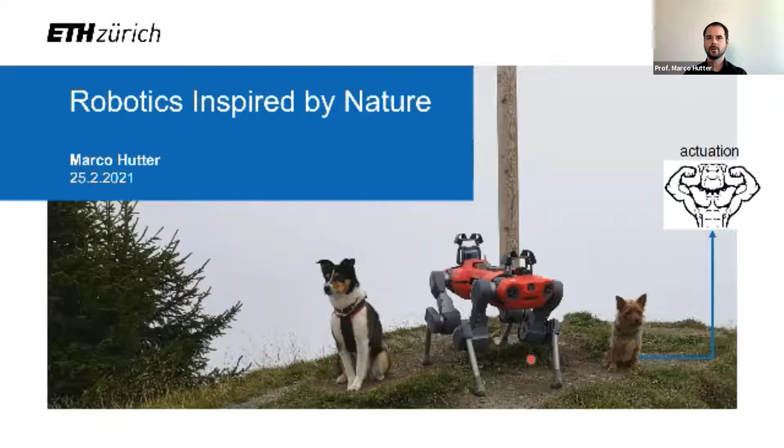In this brief introduction, I would like to tackle two elements and show how we take inspiration from nature. The first one is actuation, and the second one is control. I'll show you how we can take inspiration here from nature to make our robots a little more capable.

Now, when I started research in this field almost a decade ago with my PhD, building some of the first quadrupeds that we had at ETH, what I did first is that I bought a small dog.

What really fascinates me about dogs is that they combine all kinds of excellent skills in one unit. First, dogs are extremely fast—not quite as fast as a cheetah, but still very, very fast. Second, they're extremely versatile—almost any terrain, they can get across it and easily adapt. Third, they're very efficient—give them this amount of food and they will operate for the whole day. And fourth, they're also extremely robust. So don't worry, the dog was never harmed—it's actually just sitting below me, so everything is still in good shape.

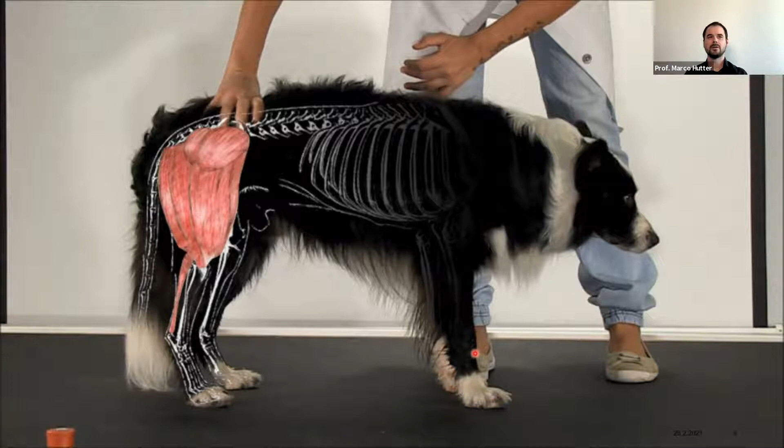Now, the reason they achieve that to a large extent is due to how these animals are built. We took one of the dogs to our office space and put it on a treadmill. If you look a little more carefully, you see that dogs are actually pretty compliant. They have rigid links for the bones, but the actuation, composed of muscles and tendons, acts very compliantly.

That helps dogs and also other animals and humans, in particular while running and doing dynamic maneuvers. There have been extensive studies, in particular by the biomechanics community, analyzing how this muscle-tendon system helps animals locomote. What they figured out is that this mechanical compliance integrated by muscles and tendons increases robustness of the system. If you get external disturbances, it just leads to a deflection of a compliant element, but it doesn't really harm the muscles. It allows energy storage temporarily, and then release of this energy in a very short time, increasing the peak power of our actuation.

And last, and I think this is really the most important aspect for us from a controls perspective, it turns a position-controlled system into a force-controlled system.

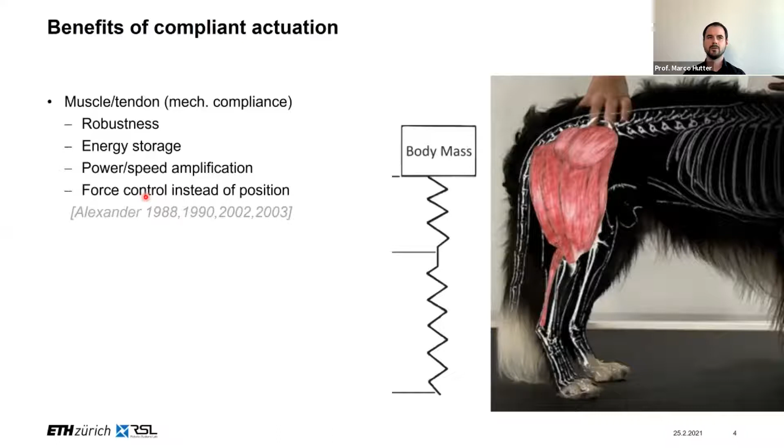Taking inspiration from that, we went into the robotic application and changed the way how classical robots were built. A classical robot is typically composed of a motor and a high gearbox reduction that directly drives the link. With this system, we want these industrial robot arms to follow predefined trajectories very precisely, independent of whether they're carrying a 200-gram screwdriver or a 200-kilogram motor block.

So any disturbance is just canceled out. And this would be extremely harmful if you would place them in an unstructured, unknown environment.

In contrast to that, by including compliant elements, just as the muscle tendon system has between the gearbox output and the link, and decoupling these two dynamic elements, you essentially get a much more dynamic and force controllable system.

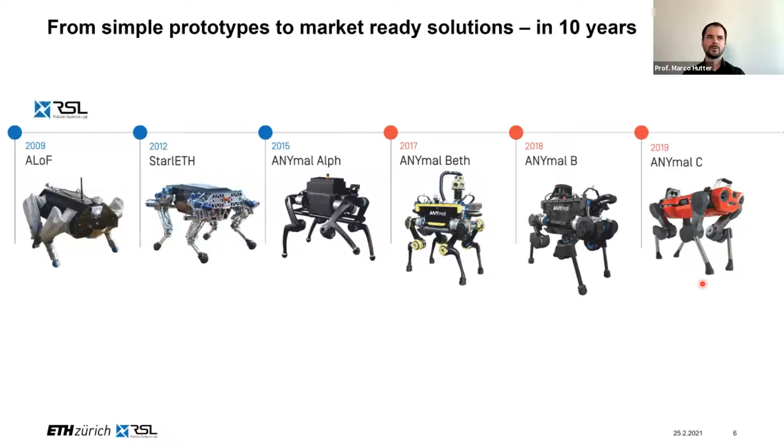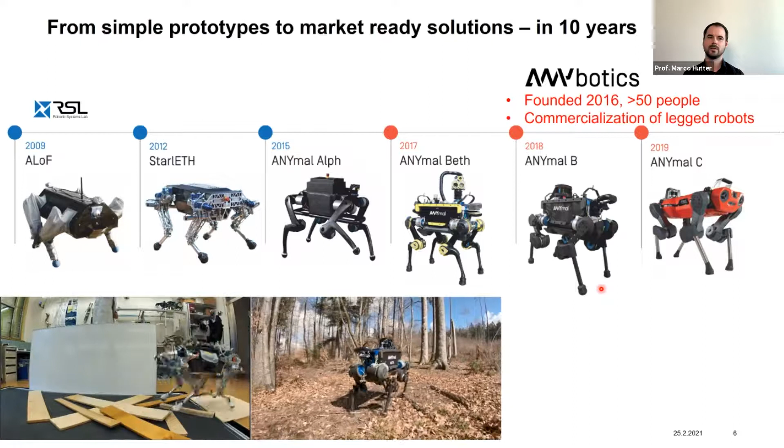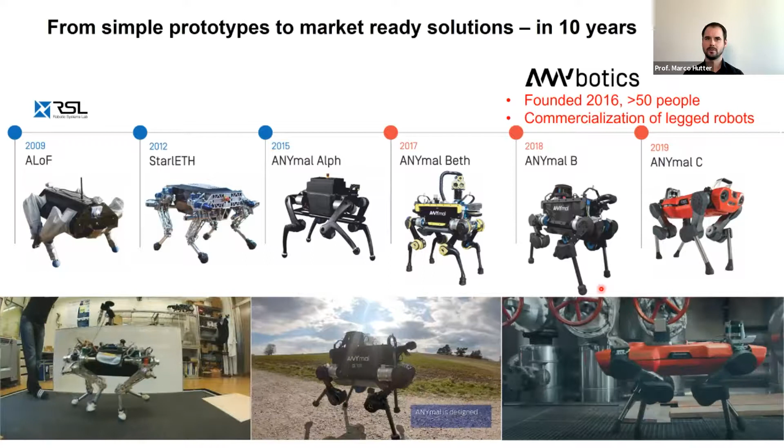Using these principles, we generated a series of quadrupeds over the last decade, which ended up in this ANYmal series. The first ones were really done in research environments in the lab, just for studying the fundamental principles of dynamic locomotion. Then we had a couple of research prototypes that we could take outside into the field, which we also shared with researchers around the world. And in the meanwhile, there's a company really industrializing this as a product in order to make it useful for industrial inspection. Now what I'd like to do is have a bit of an in-depth analysis of what happens in dynamic maneuvers like this and how these compliant elements can support that.

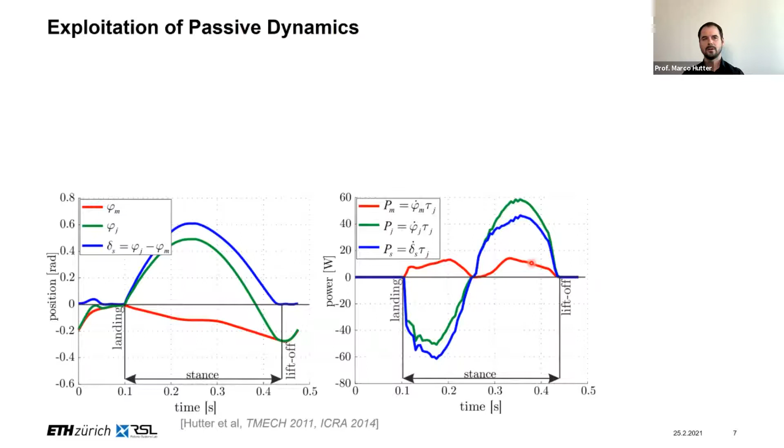If you put this in numbers, there's about 60% of energy that is stored and released purely mechanically, purely passively. The second element is that the peak power that the motor produces here is only about a quarter of the peak power that we see at the joint. So in other words, we can have a much smaller motor, still achieve high peak power, and by that make a system that is more dynamic.

Now, what interested me at the time is that if you compare this to biomechanical studies—this was a study done by Roberts in 2002, biomechanists who analyzed what happens in the Achilles tendon during running—you can see that the curves here look very similar. In other words, what we see in the muscle tendon system during running, on the biomechanical side, is really something that we could replicate here to a certain extent, using so-called series elastic actuation.

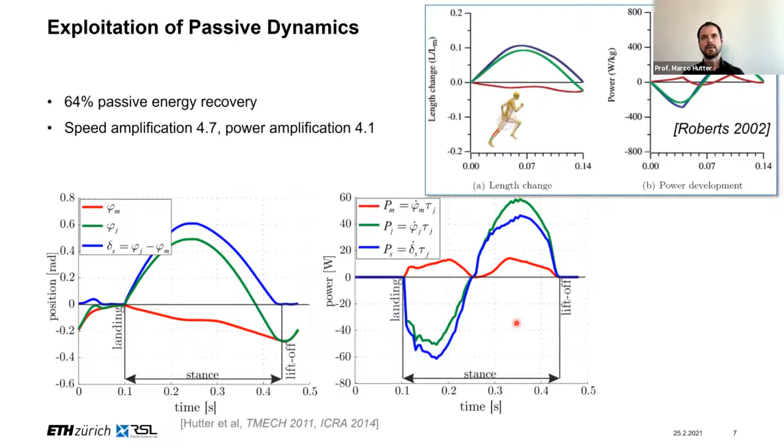The second aspect, which Nicola also introduced at the very beginning, that I want to talk about here is control, and I'll dive a little bit into what the general public often calls artificial intelligence. Or, better in our words, how we can use machine learning and neural networks in order to control robots. This is in contrast to the classical model-based approaches.

Now, to do machine learning, to learn for a robot, we need data, and we need a lot of data. So typically what we're doing is using simulation in order to generate a massive amount of data at almost no cost. We can do this much faster, without destroying robots if things go wrong.

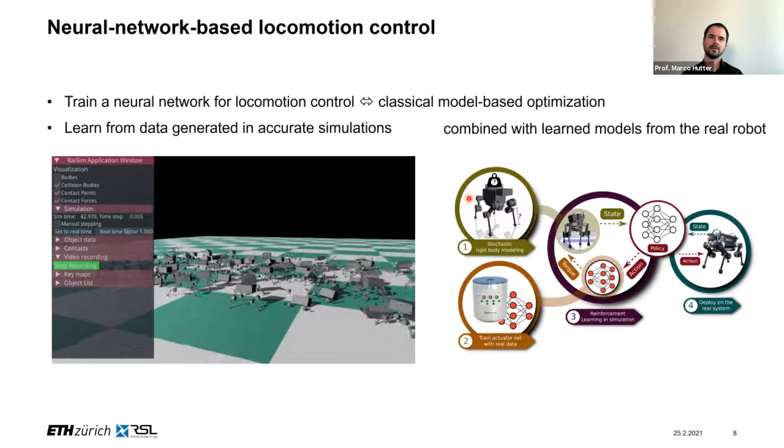The second aspect which we integrated into our research, and which turned out to be pretty crucial, is that we also went to the real systems and took information from the real system in order to bridge the gap between what you're simulating and what you see on the actual system, to make the simulation much more accurate. And a second reason I'd like to show this here is because this is work by two brilliant PhD students that were in my group, Jemin and Joonho.

Jemin, in the meanwhile, is already at KAIST, and this shows a little bit how this collaboration between Switzerland and Korea is already working today. Now, if you do this, you can start to learn to locomote. The more you learn, the better you get, until you have a machine that can really walk around.

As you've seen in the intro by Nicola, one of the key aspects is that we have machines that can adapt to different types of environments. This is something we looked at here, and it's the only slide where I dive a little more into technical details. So how can we make these robots adapt to arbitrary environments, not only flat ground like in the lab, but loose gravel, slippery, icy surfaces, snow, and even vegetation where it can get stuck.

The trick we applied is that in simulation, we trained a teacher policy which takes a lot of privileged information - things we can generate in simulation but typically don't know about the environment, like exact contact states, contact friction properties, the exact height profile, and stuff like that. Then we trained a student policy, which we deployed on the system, that tries to figure this information out purely from proprioceptive information - from experience while walking through a certain surface - to recover the same information you'd generate from privileged information on the robot.

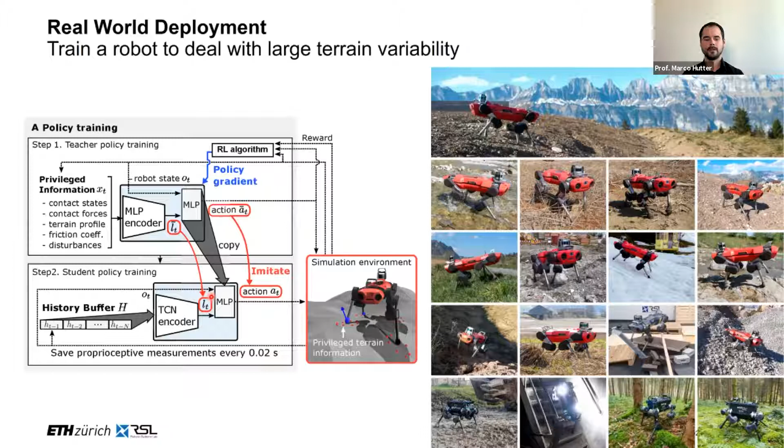We paired this with an adaptive terrain curriculum learning, so the better your robot becomes, the harder you make the environment, such that you challenge the robot more and more, until you have policies that allow the machine to walk over almost arbitrary types of terrain.

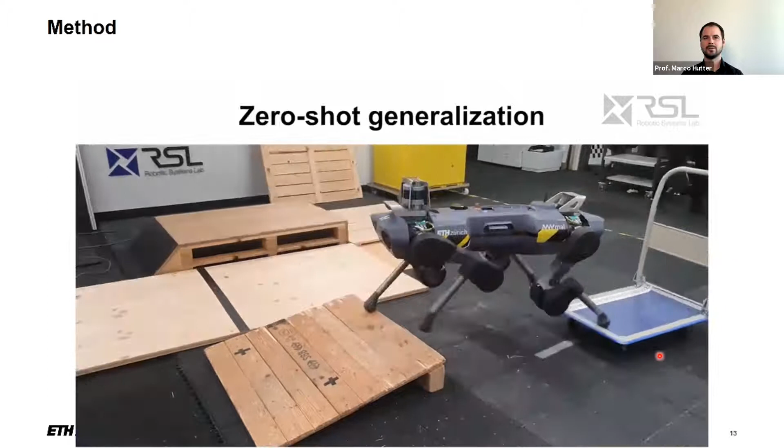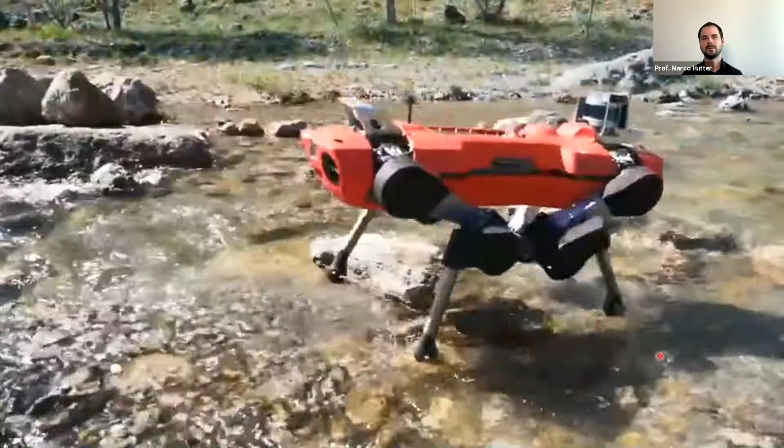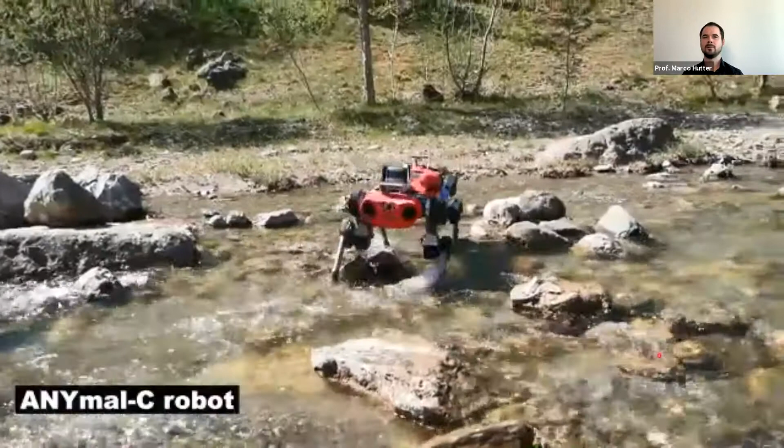We took this and put it on a real system, and it really turns out that it generalizes beautifully. We could suddenly walk across terrain purely blindly without having everything about the environment modeled in detail. You could take the robot out of the lab, bring it to some nice scenery in the mountains on hikes, where it really has to deal with very challenging grounds, loose grounds, slippery surfaces as in this riverbed, or even vegetation where the robot might get stuck. That shows a little bit where this mobility can go in the future and what kind of applications one can envision in the near term or even midterm.

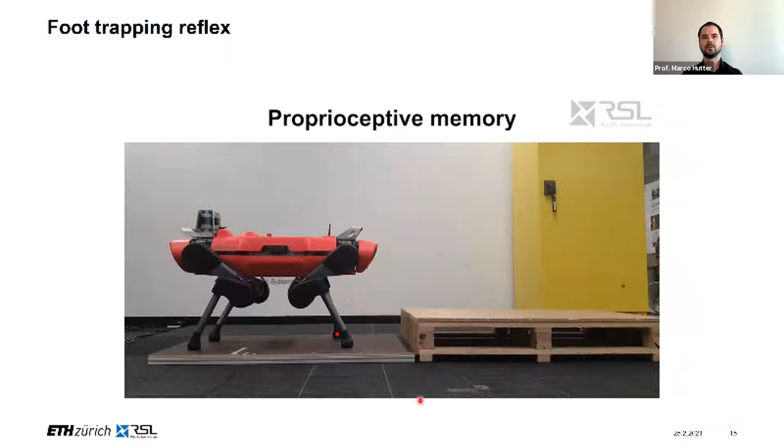A few interesting aspects which are also seen in nature to a certain extent: what you see here is the robot walking onto a step that it doesn't see. The robot starts walking, then hits that obstacle. Now it remembers there's an obstacle and triggers reflexes to get around it. These are elements that previously had to be handcrafted, and now with this new technology, we could generate neural networks that remember this and use it to trigger reflexes.

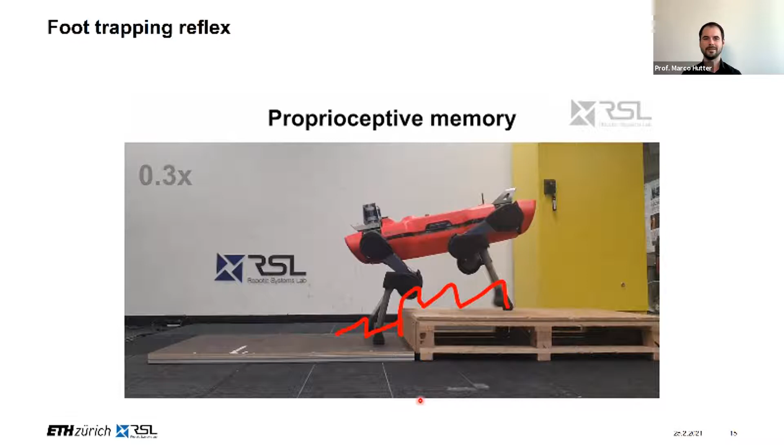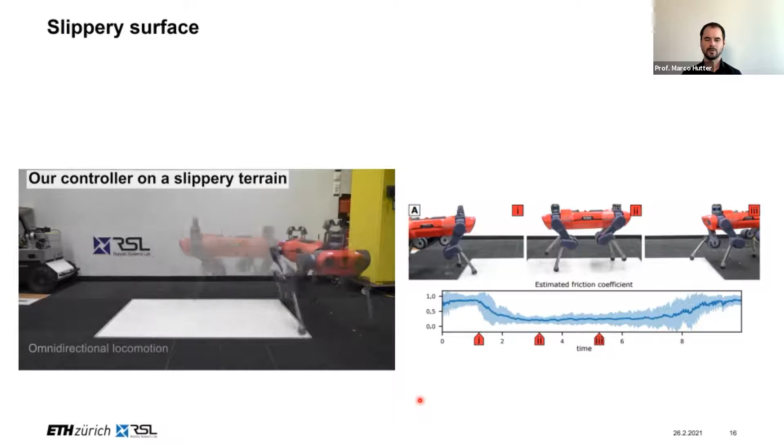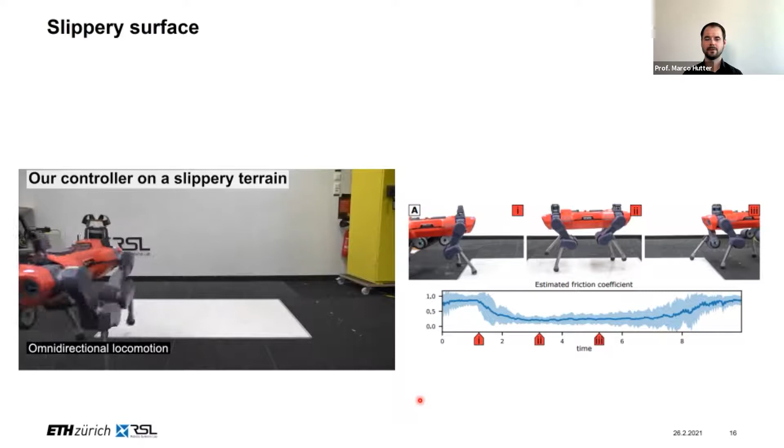Similar behaviors happen when going on very slippery grounds. You see how the robot walks on slippery surfaces and immediately adapts its behavior. That's also something that before had to be tediously handcrafted, and now we have methods that allow the robot to estimate friction coefficients. As soon as we start sliding, we walk a little more carefully, and once we have great surface under our feet again, we walk normally.

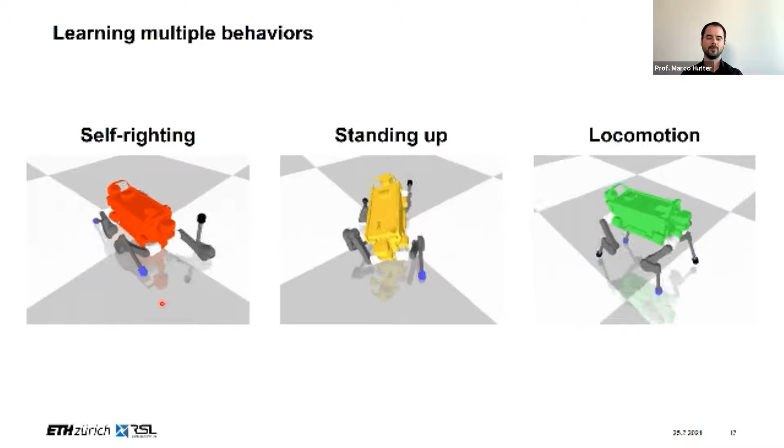You can also start combining different behaviors and do all kinds of crazy maneuvers. Here is how to combine self-righting, standing up, and locomoting in a clever way. These are behaviors you can generate with that.

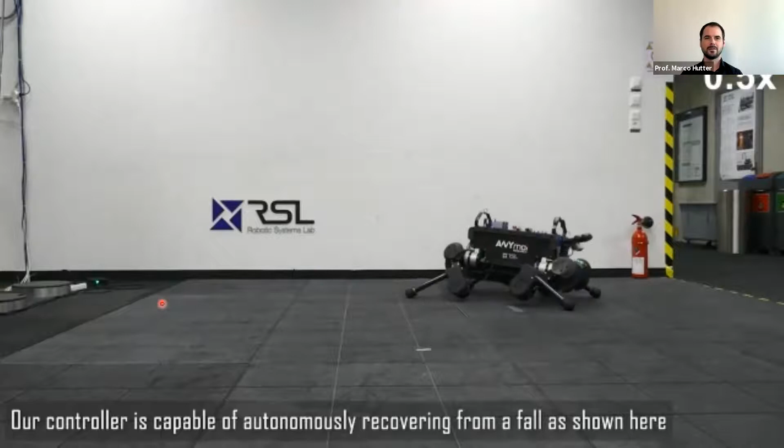You see a robot that falls over, realizes it falls over, recovers from that, and keeps operating. It can actually be put in an arbitrary configuration on the ground, and the robot will figure out the way to stand up and continue to operate.

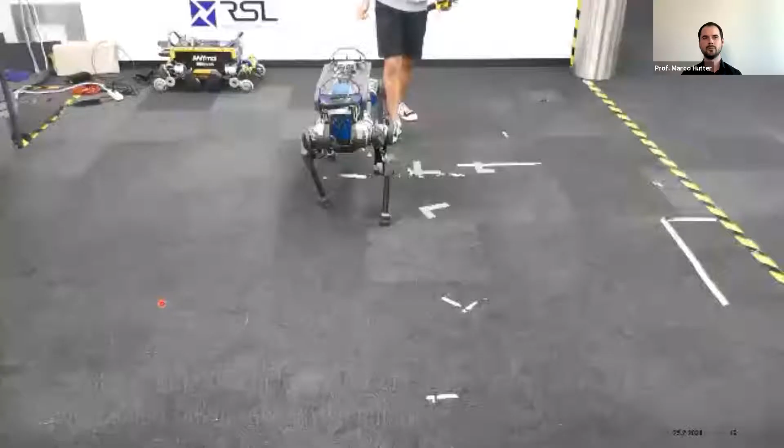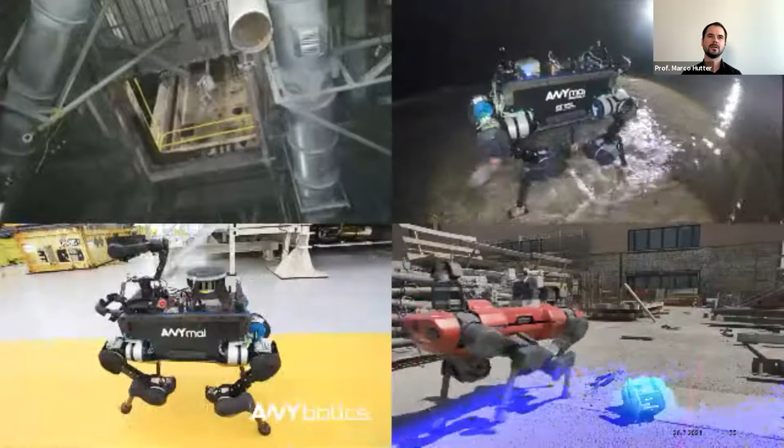I think it's a very nice demonstration of where mobility can go in the future, what we will be able to achieve with these types of robotic systems, and what type of applications we could possibly tackle in the future. With this last element, where I show you where this robot is deployed, I want to come to the end of my introduction talk. You see here 4 different areas where we deployed it.

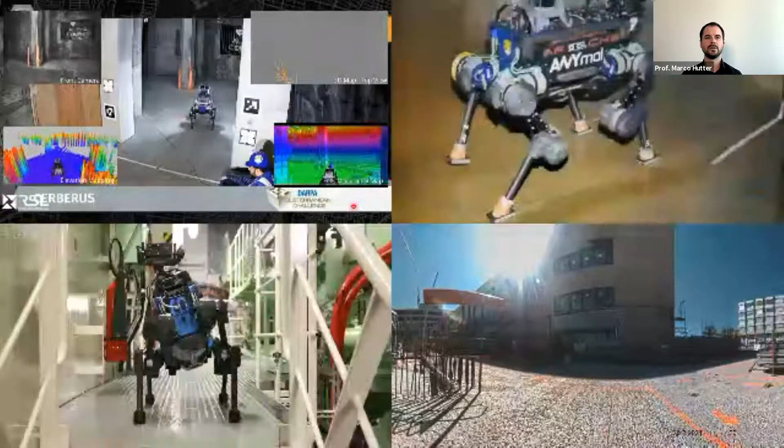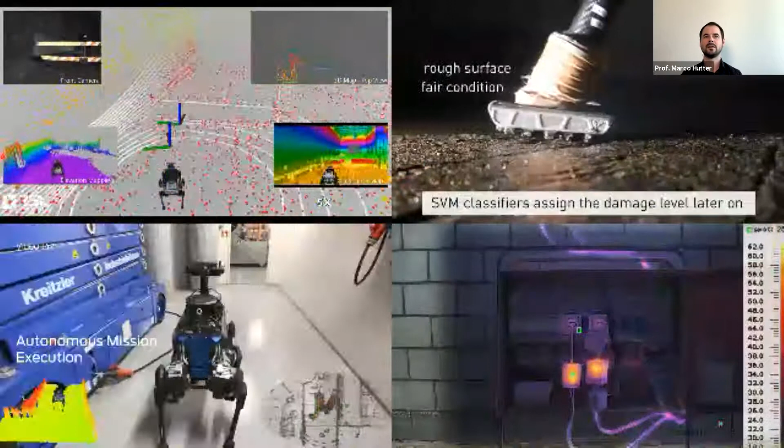Top left is an inspection or exploration mission we did during the DARPA Subterranean Challenge in a nuclear power plant in the US. The robot is left free at the entrance and has to go into the plant, explore the complete environment, figure out how it looks, and assess whether there's a danger somewhere or not.

You see how the robot maps the environment, detects free spaces, and moves around autonomously. On the bottom left, you see an inspection routine on an offshore site in the North Sea. Then we have inspection and surveillance for safety purposes on a construction site, bottom right.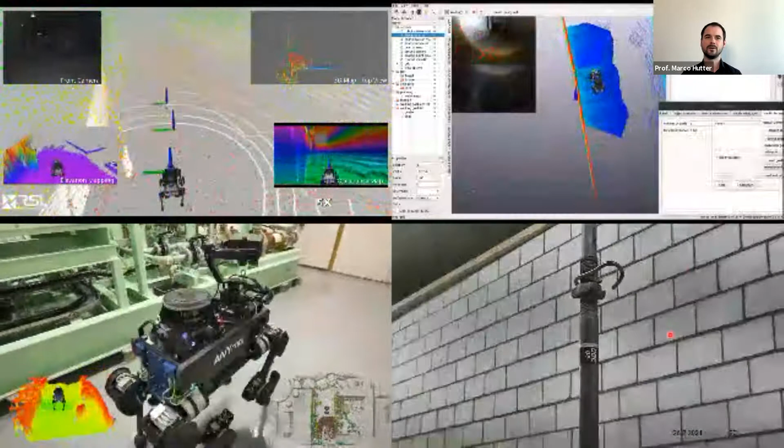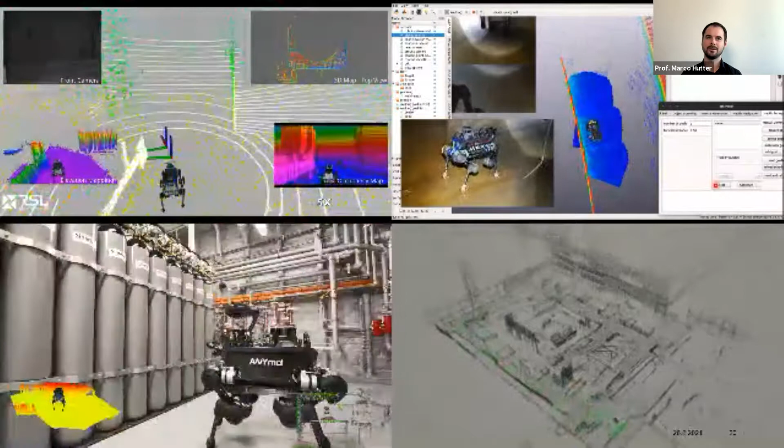And here on the top right, you have sewer inspection in Zurich. The City of Zurich has more than 100 kilometers of walkable sewers, where on a daily basis 10 people are sent walking in the sewers to figure out whether everything is operating the right way, if there are cracks, if things are stuck. These are jobs that in the near future I would like robots to take over.

So let me conclude with a few statements about why I think inspiration from nature can help us a lot in robotics. First, nature is really a great source for inspiration. But vice versa, robotics can also help us better understand nature. By showing principles in robotics, we can help biomechanists and biologists interpret some of the findings in nature.

Second, I think it's important to understand that biological systems and robotic systems are distinctly different. So in my eyes we should really not try to copy nature, but rather borrow ideas from nature, and then exploit the strengths that we have in robotics.

Third, nature is also helpful as a feasibility demonstration. It demonstrates what is possible given the constraints of physics on Earth. Knowing that something works is already a pretty big hint whether you should pursue it, and it also hints at what requirements you need in terms of energy, power, and what size of robot you might design for a certain task, and what a possible solution might be.

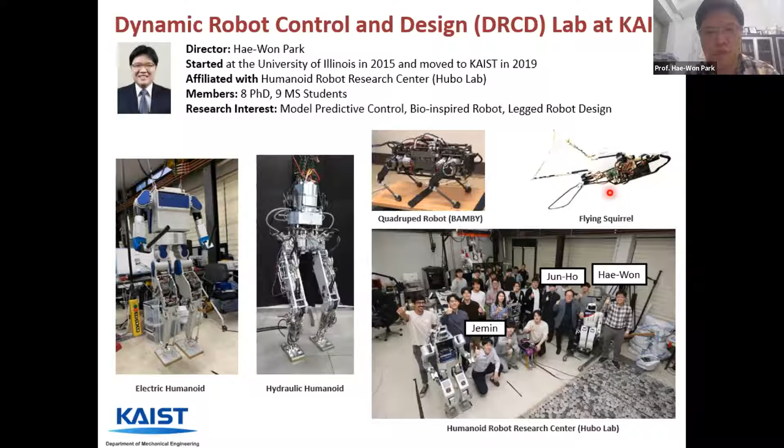Let me show my research video. This is my master's degree topic, which is a dolphin fish robot. It can actually swim up to 1 meter per second, and it can make a turn left or right.

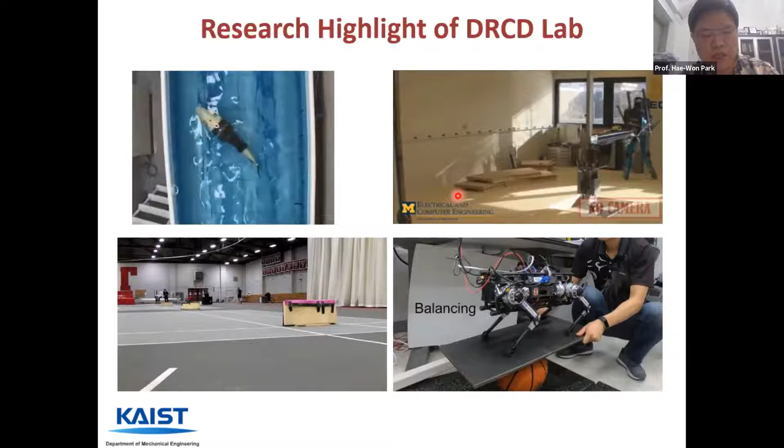The second video is about my PhD topic, which is Mabel, bipedal robot Mabel from University of Michigan. In this video, the robot is able to walk over uneven terrain blindfolded, so you can imagine the robot has to walk on uneven terrain without any vision sensor.

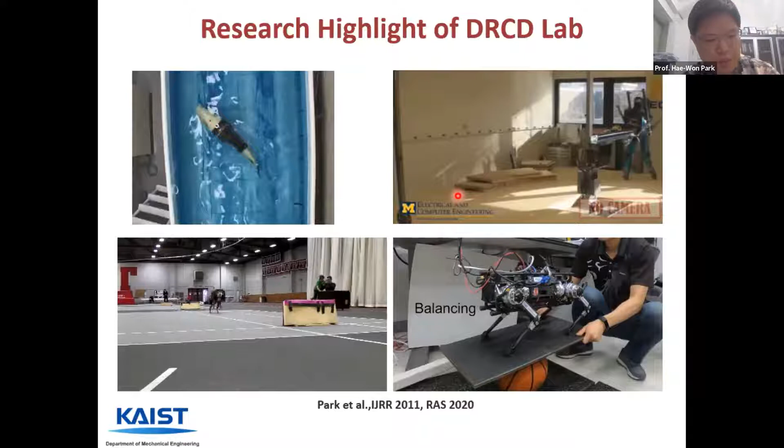After that, I went to MIT. This is probably a very famous video on YouTube, the MIT Cheetah 2 robot running and jumping over obstacles. Here I use the vision sensor to detect the obstacle and plan the jumping motions in real time.

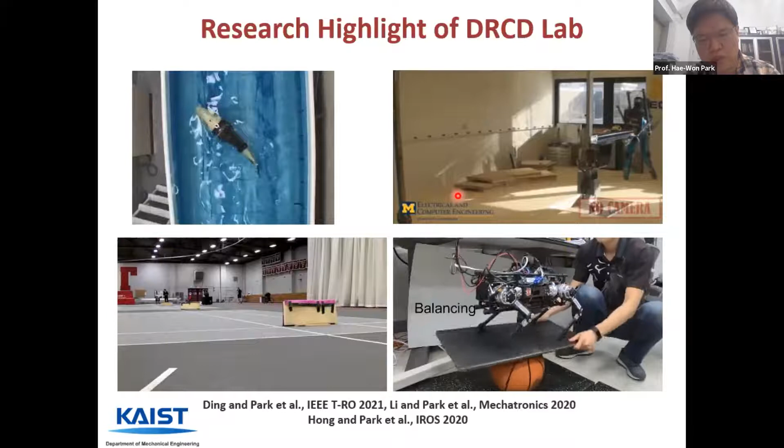After that, I joined University of Illinois, and I made a quadruped robot that is able to balance. It's a really small robot, but it has the ability to calculate all the forces and all the state estimation inside the robot, so it's able to overcome uneven and rough terrain utilizing the model predictive control approach.

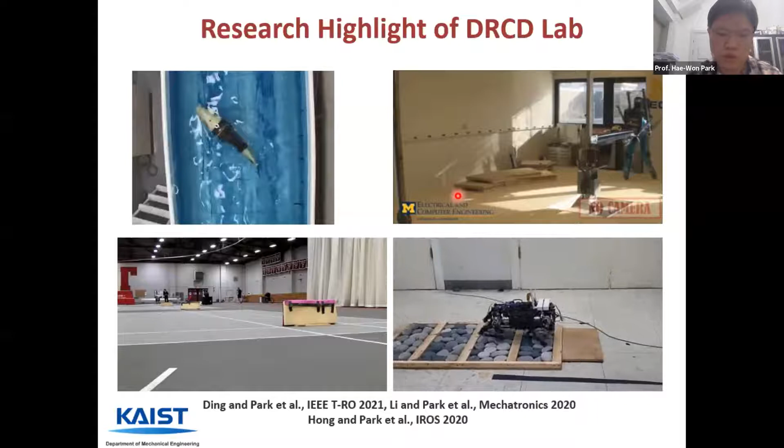I now focus more on the control side of the robot, but the topic of this webinar is bio-inspired design of legged robots, so I will talk about that.

Probably one of the most famous bio-inspired robots is the Stanford Gecko robot from Stanford University, made by Professor Sang-Bae Kim, now at MIT. This robot uses nanostructure to enable vertical wall climbing.

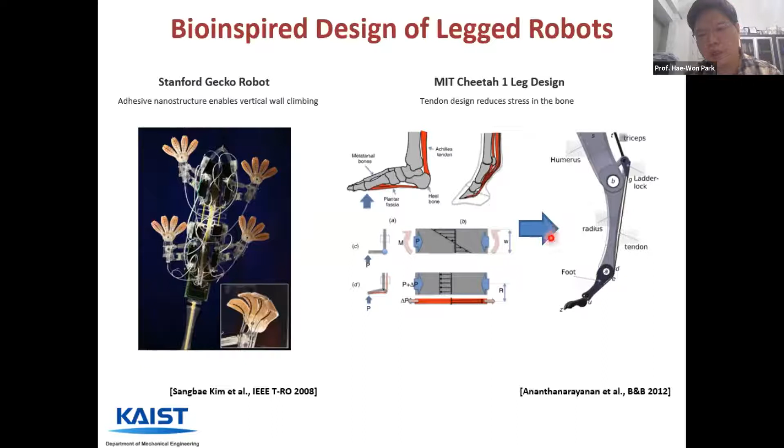Also, the MIT Cheetah robot utilizes bio-inspired design. They utilize tendon and bone structure observed in quadruped animals and implemented this idea into the leg design to reduce the stress in the bone.

When we design this kind of robot using bio-inspiration, we usually follow this process: first, we define the functional goal we want to achieve in the robot. Then we look at the biology, how the biological animal achieves this functional goal. We try to implement and devise some robotics mechanism utilizing the tools in robotics, for example analysis and simulation, engineering design and implementation, and finally experimental testing to verify whether the functional goal has been achieved in the robot.

In this talk, I will provide two examples of this process. The first functional goal I want to achieve is aerial and terrestrial multimodal locomotion, and the second functional goal is a foot design with improved traction.

So we will look at the biology. Especially we look at the flying squirrel, how it achieves aerial and terrestrial multimodal locomotion, and we look at the foot design of the cat. I will talk about engineering design, simulation, and experimental testing of this mechanism.

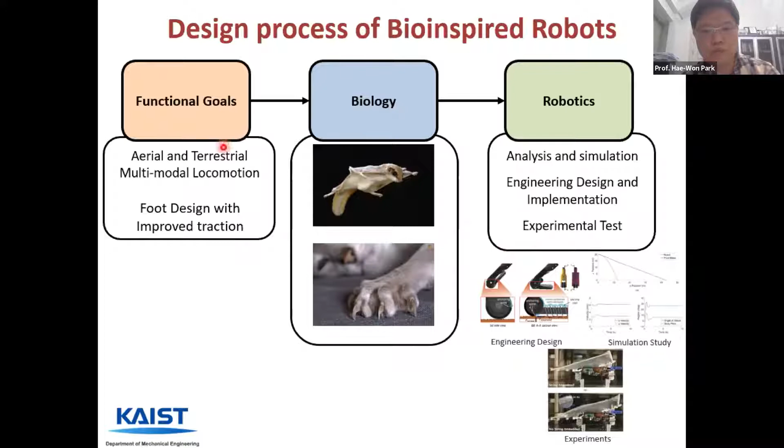But before we go on, we have to take these topics into consideration, because the animal and the robot are different systems and mechanisms, so we have to take this into account in the design of the robot. First of all, animals have a lot of degrees of freedom, usually more than 300 degrees of freedom.

We cannot have 300 degrees of freedom in our robot because it can be too complex and too heavy. So usually the robot's degrees of freedom is much less than 50, and the actuation system is different. In robots, usually motors are used for actuation, while in biological systems, muscles are used.

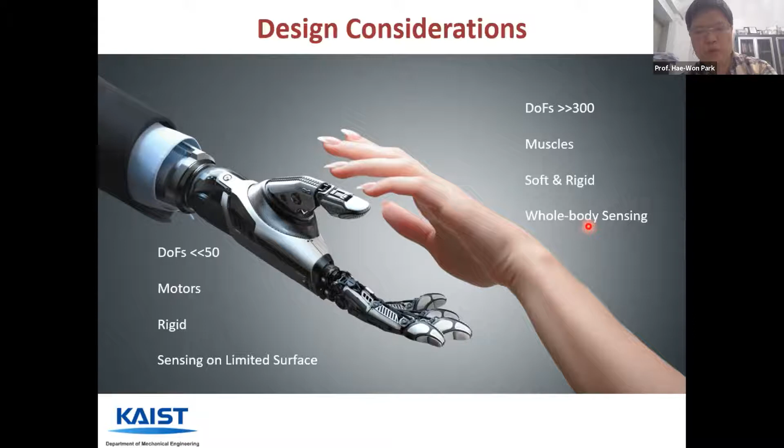The material and components are different. Robots are usually made with rigid parts, while biological animals have both soft and rigid parts. Sensing capability is really limited in robots, while biological animals have whole body sensing for detecting contact and stress on the muscles, something like that. So we have to take this into consideration when we design the engineering system.

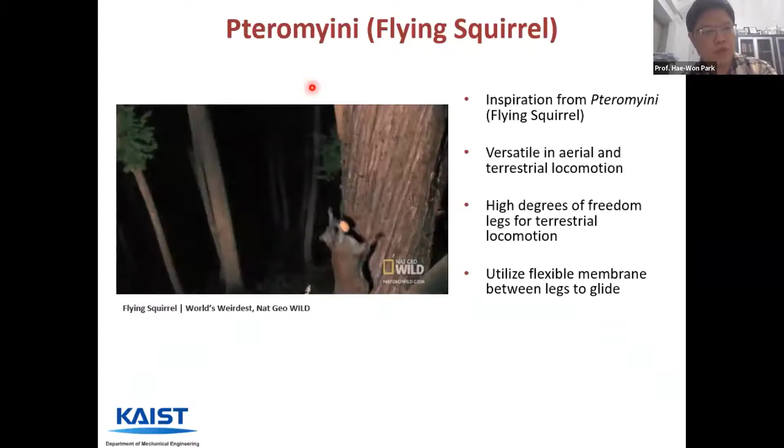Biological animals like flying squirrels can vertically climb up a tree and glide from the tree to reach another tree, and they actually modulate their control input, such as the shape of the wing, in order to modulate aerodynamic forces. The gliding trajectory of the flying squirrel is composed of 3 phases.

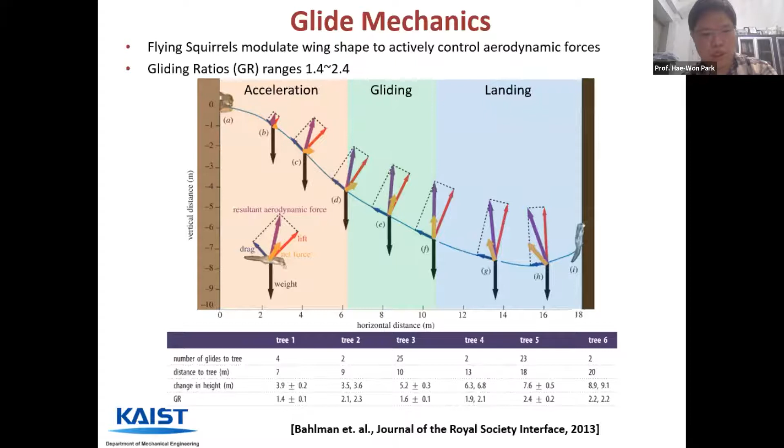In the acceleration phase, it gains speed sufficient to manipulate the aerodynamic forces. After it gains speed, it utilizes the wing shape to have a stable gliding. Near the end of the gliding trajectory, it prepares for landing in order to reduce the impact from landing. From this gliding trajectory, it can reach up to a 2.4 gliding ratio, which is the ratio between horizontal distance and vertical distance traveled.

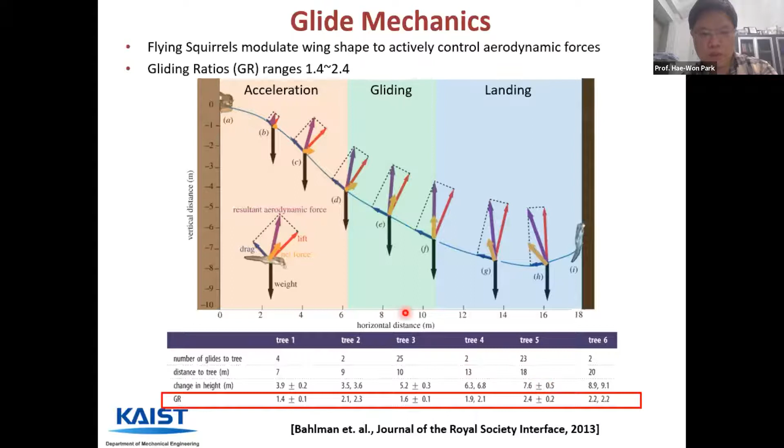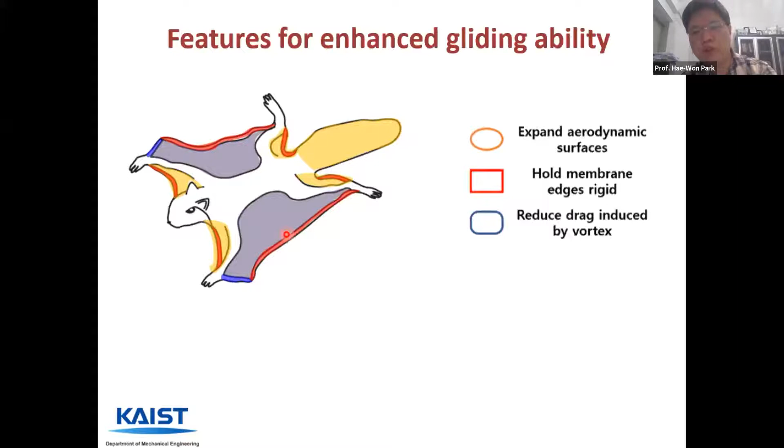For this gliding performance capability, the flying squirrel has 3 main features. First, in addition to the wing surface between front and rear leg, it has additional aerodynamic surfaces such as here and there, and a tail. It has a thicker bundle at the boundary of the membrane to make the edges rigid, and it has a wingtip to reduce drag induced by vortex. This wingtip is really similar to the winglet of a commercial airplane.

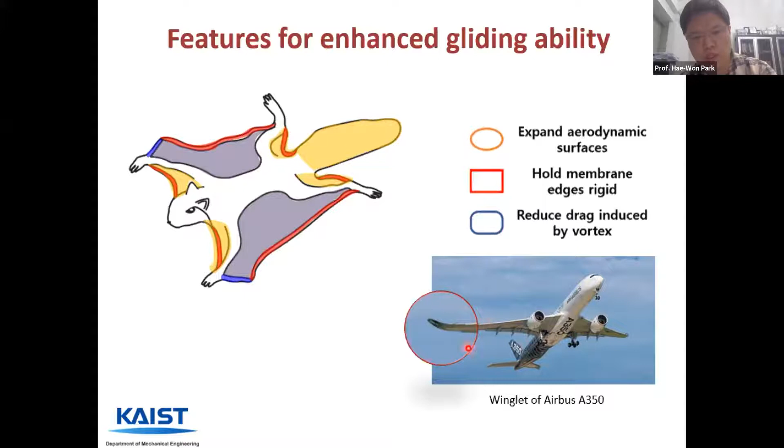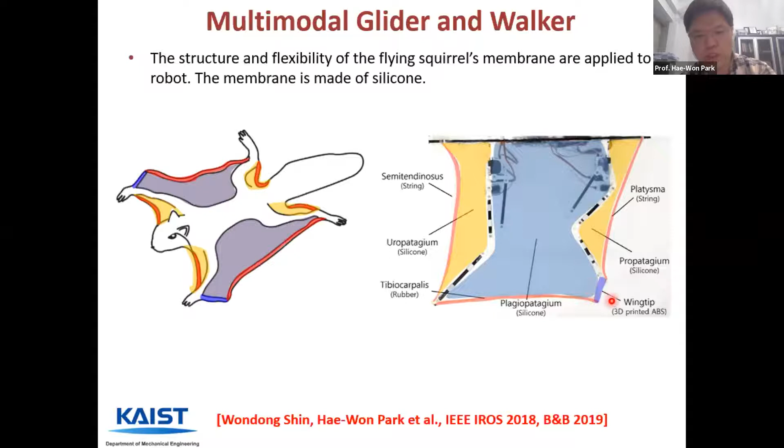After this membrane design, we did a simulation in order to check that the robot can have enough gliding ratio while gliding in a stable manner, and being able to change the gliding speed or gliding pitch angle.

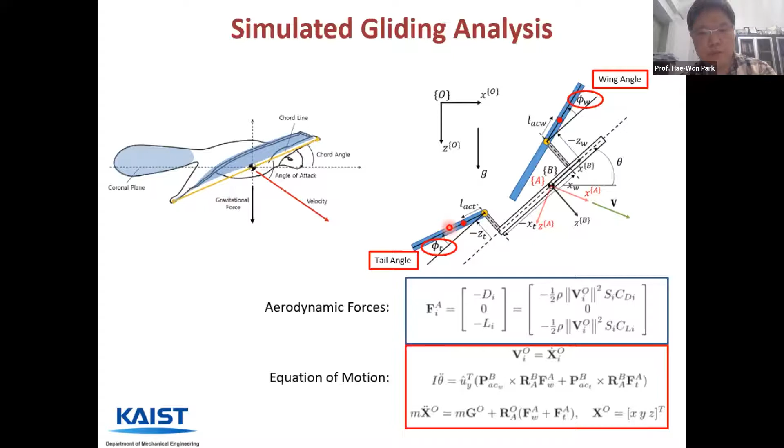There are 2 main control surfaces in the flying squirrel, which are the wing and tail. We have a simplified model of the wing and tail here, and our control inputs to control the gliding behavior are wing angle and tail angle. We have an aerodynamic force model, which includes lift force and drag force, and an equation of motion to explain how the gliding behavior emerges from the control input.

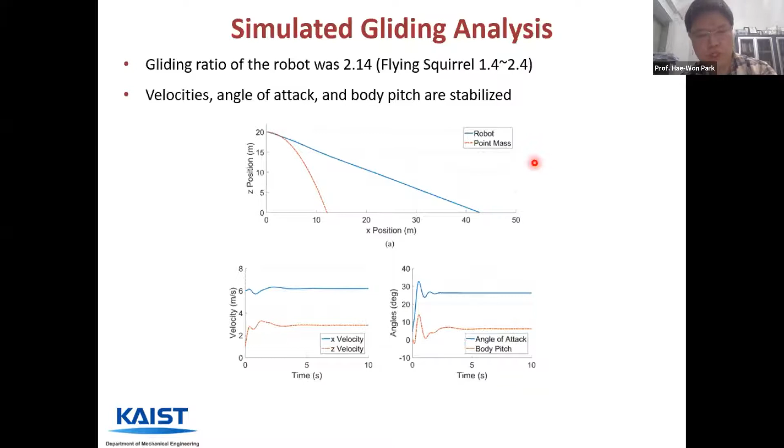When we did the simulation, we found that the gliding ratio of the robot would be 2.14, which is about the same as the gliding ratio of a flying squirrel, and velocity, angle of attack, and body pitch could be stabilized with our design. We further checked that by changing the tail and wing angles, we can change the gliding velocity and body orientation as we wanted.

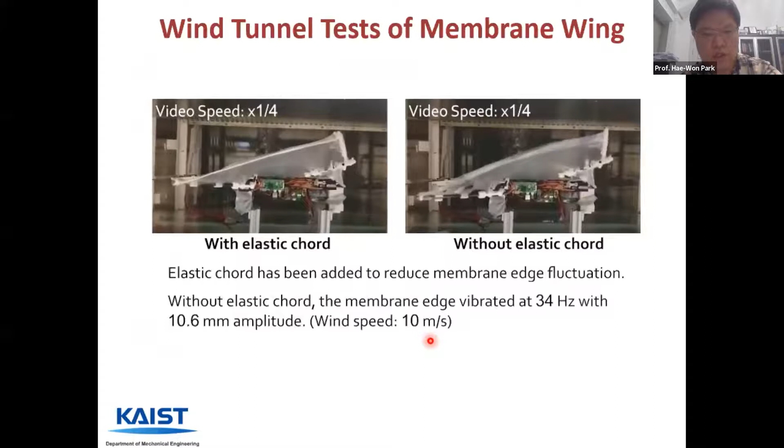After we fabricated the membrane wing, we ran experiments on the wing. On the left, we have a wing design with elastic cord, and on the right, a wing design without elastic cord. Without the elastic cord, the wing fluctuates much more than the design with the elastic cord. So we can see the effect of the elastic cord design.

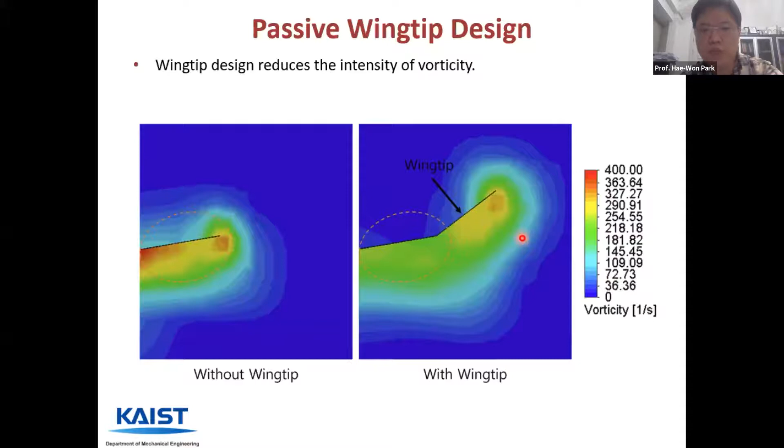So we checked that the wingtip design will be effective in reducing the drag force. This wingtip design we designed with a mechanical, passive mechanical design.

This wingtip should be retracted when it's walking. We didn't want to add one more actuator to enable switching between the retracted wingtip design and the straight wingtip design, so we devised a passive mechanism.

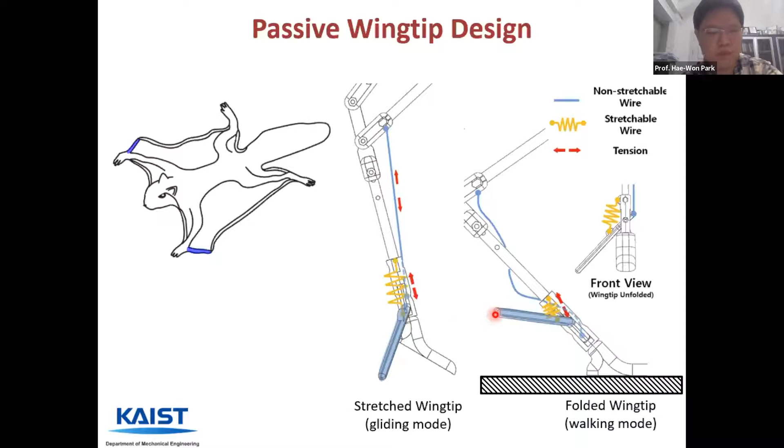A simplified passive mechanism. So with all of these design features, we could make a flying squirrel robot, which is about 200 to 400 grams.

We fabricated a silicone wing with a thickness of 150 micrometers, and it has 13 RC servo motors to control the wing surface as well as the walking motion.

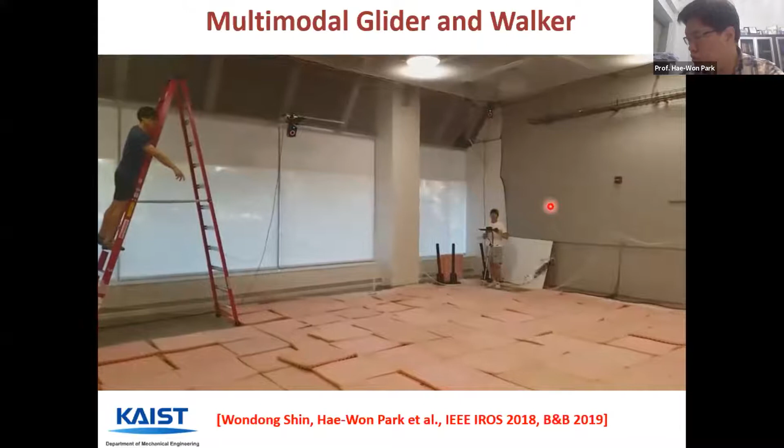So this is an experimental video. You can see that it actually changed the angle of attack in order to reduce the landing velocity. And this is a frontal view of the robot.

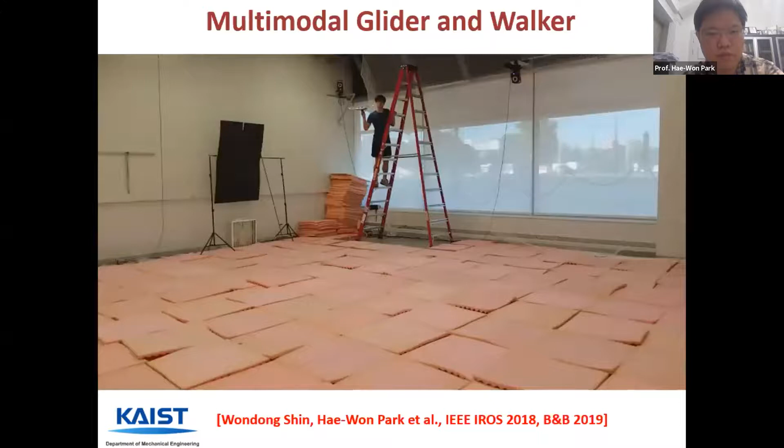And this is actually a longer gliding demonstration.

My computer got slow, so let me check again. Okay, so this is a longer gliding test from the 3rd floor of the building.

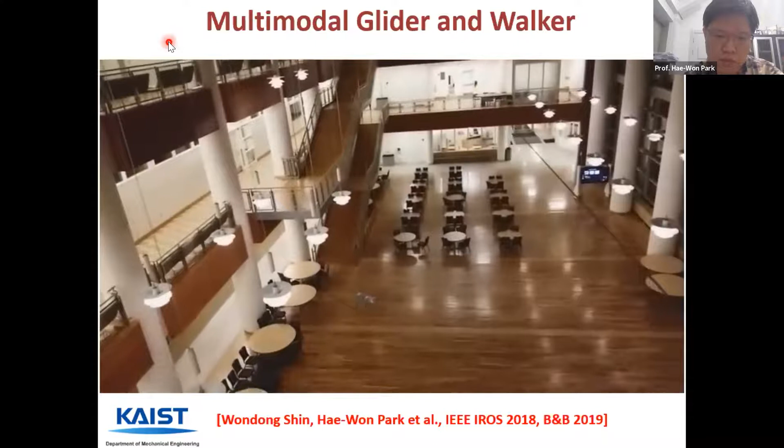So this robot could achieve a gliding ratio of 2.21, while its mean value is 1.88, which is very similar to an actual flying squirrel's gliding ratio.

We could also manipulate the angle of attack, horizontal velocity, and vertical velocity by changing the wing shape.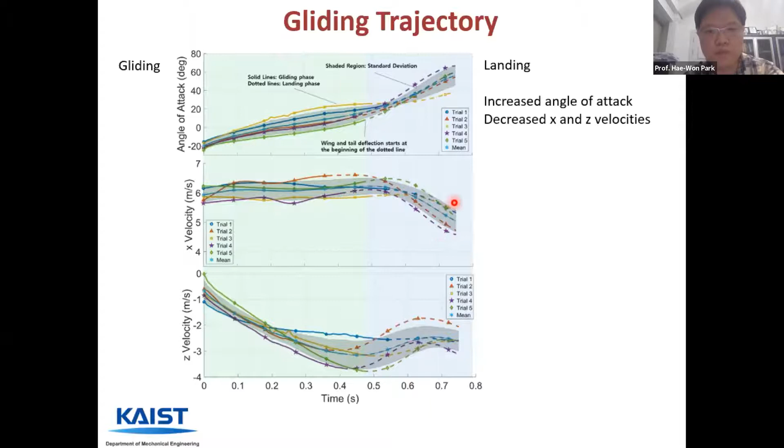This robot is also able to walk using the trotting gait, which is the most common gait used by quadrupedal animals.

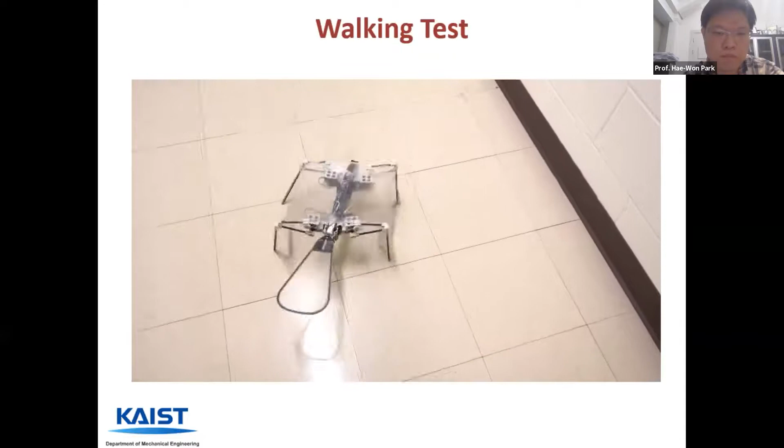And because of its versatility, it can also do crawling locomotion.

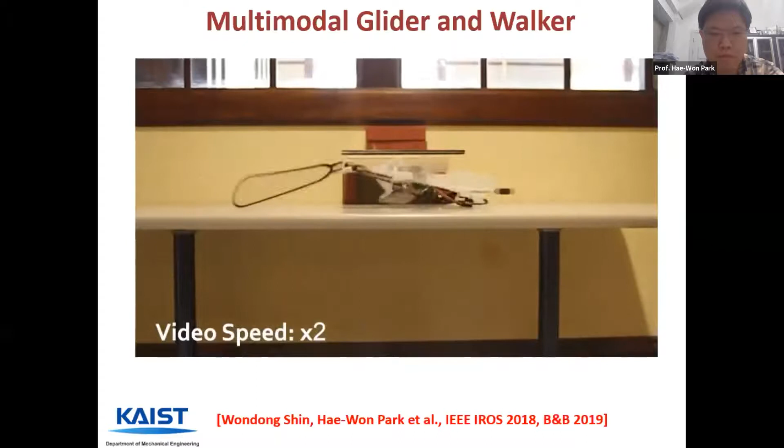Okay, so my second example is anti-skid foot design for improved traction.

Most foot designs in quadrupedal robots are just simple spherical and cylindrical shapes, because we usually assume spherical rolling contact with the ground.

But in animals, the foot actually has a really complex mechanism inside using tendons, so it can protract and retract the claw.

So when the cat needs the claw, it actually protracts it, and utilizes the claw in order to climb up vertical walls.

So when we have irregular surfaces, this foot can use the claw to enable vertical wall climbing.

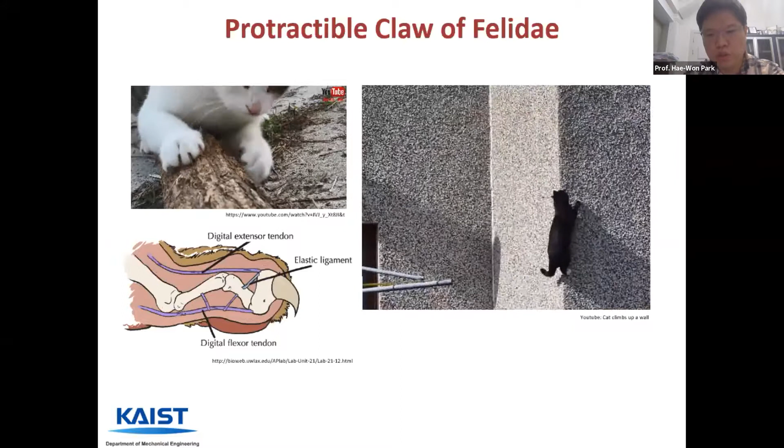As I explained, the foot has a really complex design, so we cannot just copy that. We devised a design with a primary pad, which is rubber, and a secondary pad, which is a microspine array.

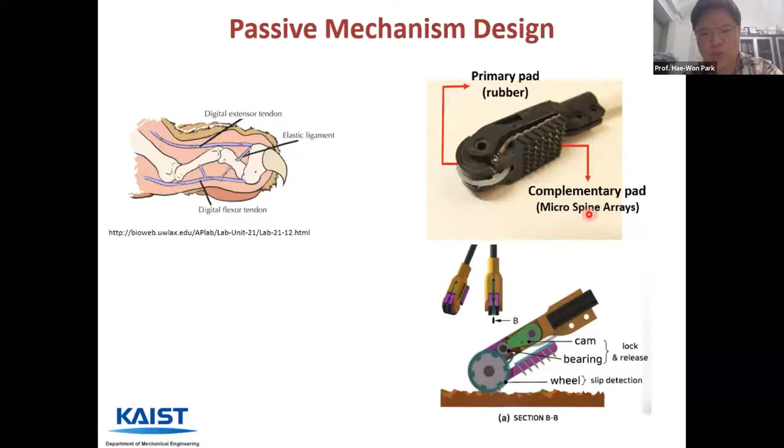This microspine array will have larger traction than the primary rubber pad. In this video, we show the design.

So here we have the primary foot design with the rubber pad, and we have a microspine array as a complementary pad.

We tested the microspine array foot to check that it has larger friction, larger traction. You can see that it has 3 times more friction than a normal rubber foot.

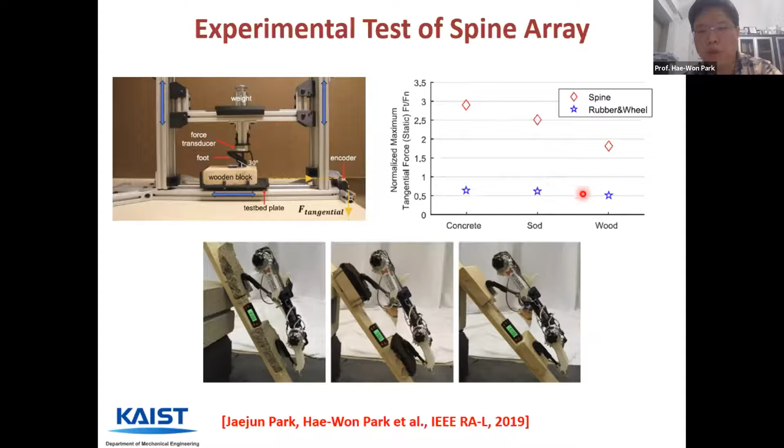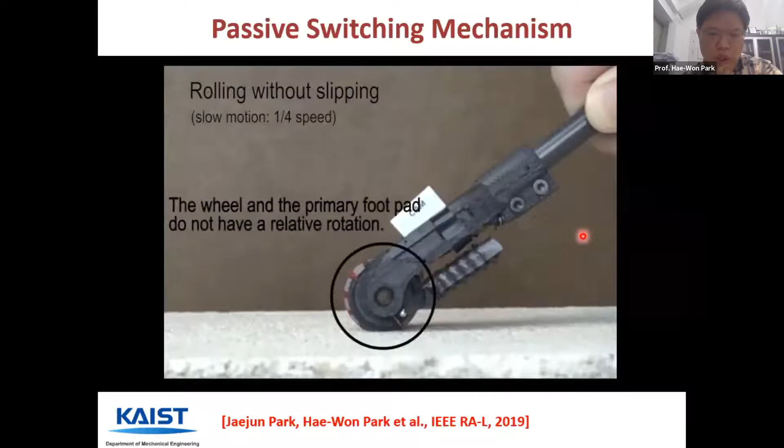Now we devised a passive mechanism to switch between those two pads. This design has a wheel and cam design.

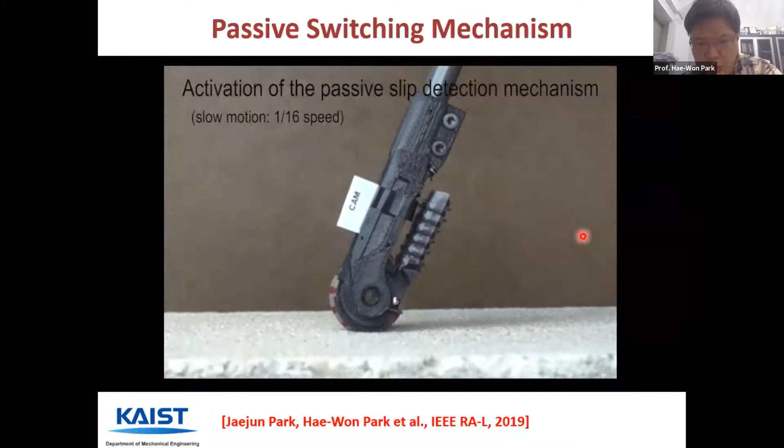In normal operation it has a rolling contact, but when it starts to slip, it can trigger activation of the microspine array, which is installed in this pad.

So you can see that whenever it slips, it will activate the microspine array. By utilizing this, we could make the robot jump and attach to a very steep slope.

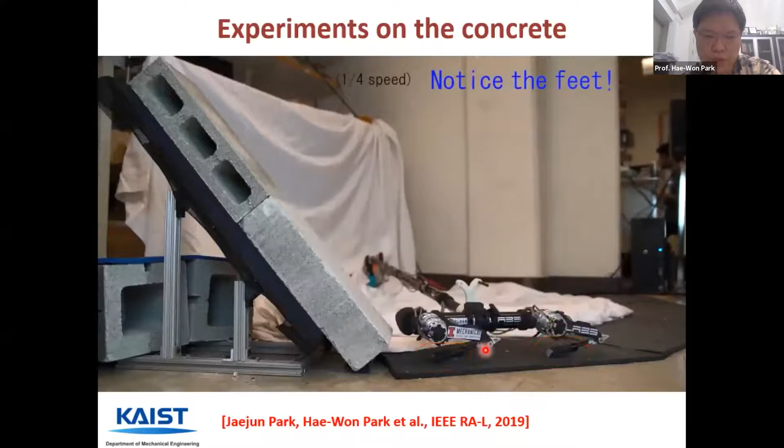Here, because of the rubber pads, we have enough traction without utilizing the spine array. But when the robot lands on steep terrain, it needs more traction.

So with this need-based switching mechanism, we deploy the microspine array in order to increase traction.

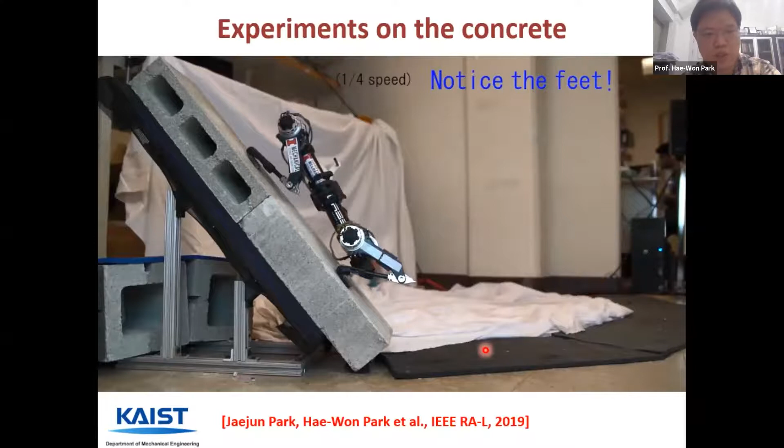And we tested this mechanism on various types of surfaces, as you can see here.

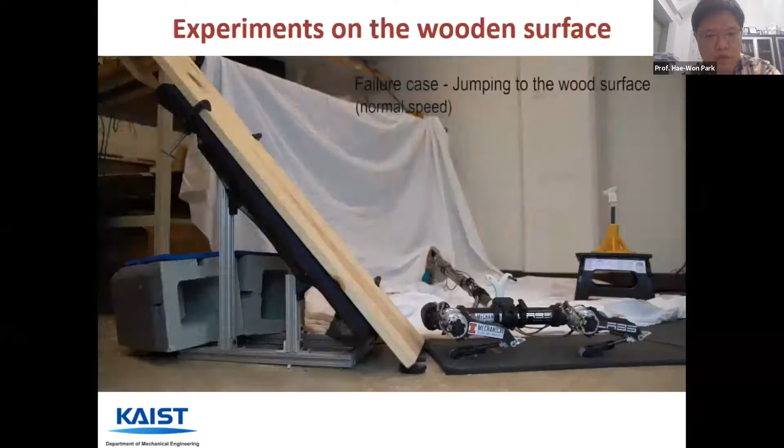Sometimes this spine array fails to attach to a stiffer surface because it could not utilize the irregularity on the surface.

So in conclusion, I showed two examples of bio-inspired robot design, and the functional goals we wanted to achieve were aerial-terrestrial multimodal locomotion and foot design with improved traction.

We drew biological inspiration from the flying squirrel and the cat, and we implemented these ideas into robotics by utilizing simulation analysis, experimental design, and engineering design.

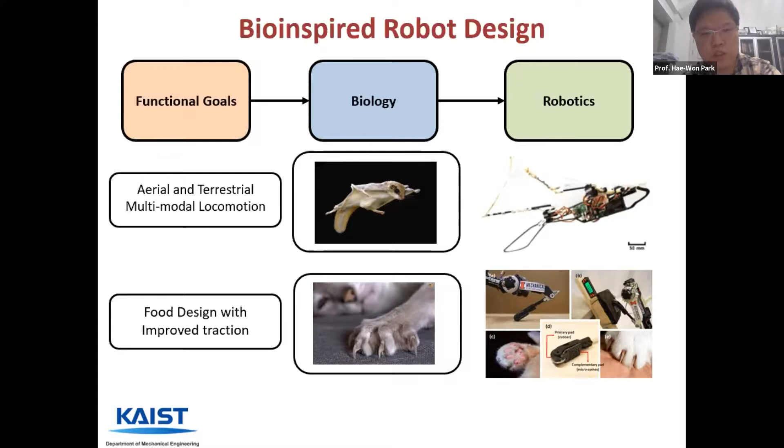So with that, I want to conclude my talk. Thanks for listening.

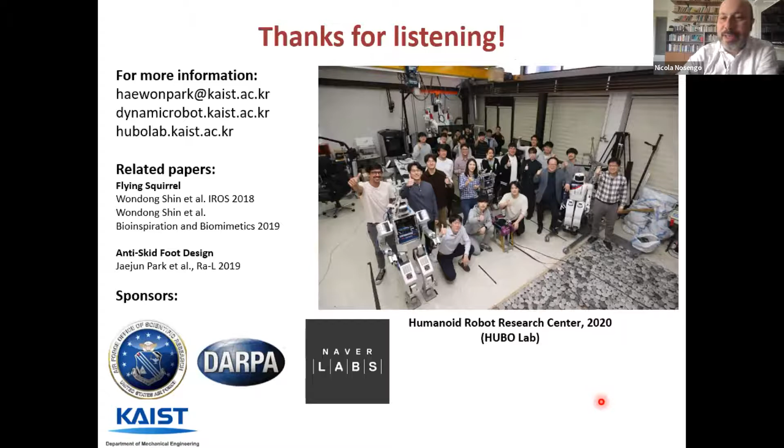Thank you very much, Professor Park. It was another fascinating talk that I think demonstrated very well what Marco Hutter was also mentioning, the fact that

bioinspiration does not mean merely copying nature, but actually studying nature to extract engineering principles and then develop those principles, which is complex engineering work, much beyond copying a nature solution.

So thanks to both our panelists for this fascinating, though necessarily quick, tour through robotics inspired by nature. It is time now for some questions.

I have a few questions myself, but I'd prefer to give preference to the ones from the audience. In the chat, we have one, a bit technical, mainly for Marco Hutter from Zaso Mehis, who is asking whether the springs in the legs deteriorate over time due to metal fatigue, or if there's a way to prevent this. I think he's referring to robots, I guess.

When we did the first prototypes, very simple, that was an issue. But once you realize this is something you want in a machine that operates over a long time, you start designing the materials and actuators for long-term life cycles. First, the choice of materials - we now have special titanium mixtures in the latest generation. Second, you design the properties so it can last forever. Third, you do a lot of life cycle tests on test benches. We stress these actuators over millions of load cycles before deploying them on a real system or product.